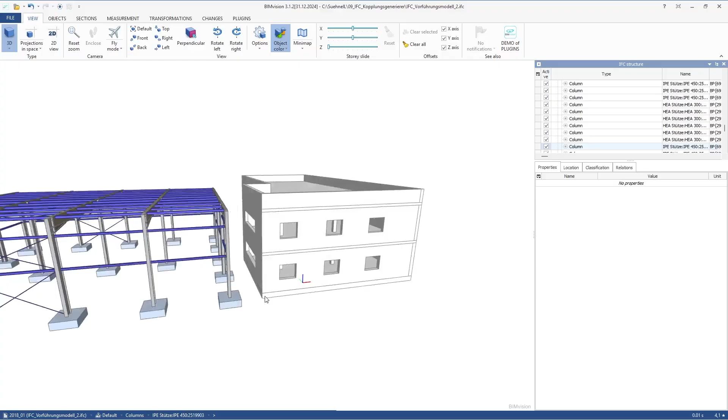Let's start directly with the IFC model that I want to use for today's presentation. I'm using the BIMvision IFC viewer for that. You can see it's some mixed structure - we have a steel structure on the left-hand side and a regular simple concrete structure on the right-hand side with some columns inside and so on.

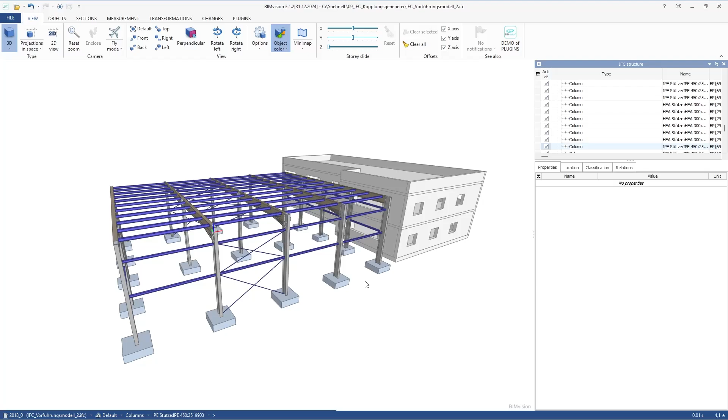Concerning the steel structure, there are already some steel joints included, some bolts, some stiffeners and so on. So this is the IFC file that I want to use for the creation of the analytical model in RFEM 6.

How can we use such an IFC file? This can come from Revit, Tekla, or any other CAD program. How can we use it? Well, let me show you in RFEM 6 directly.

First of all, we have to import the IFC file. I think this is clear. Via File, Import, IFC - that's the right path. I can select the IFC model and import it.

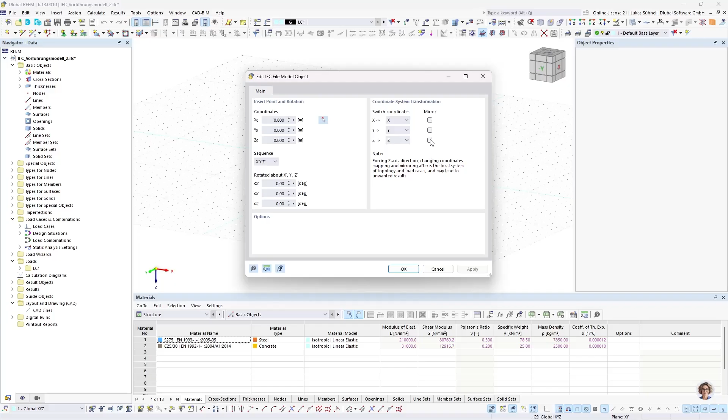Now, the first screen that will show up is dealing with the insertion point and the mirroring of these structures. Usually you will have to mirror it in the CAD software. The Z-axis usually shows upwards; in RFEM 6, often downwards. So in my case here, I have to mirror the Z and the Y-axis.

Then the import will be started, and in a couple seconds we will see the IFC file. So that is the IFC file that we just imported, that we also saw in the BIMvision viewer. And we can also show it inside RFEM 6.

So what we currently see, this is no native data. We do not have any members, we don't have any surfaces. The objects that we see here are IFC objects, graphical objects. And we can display them because we have an IFC viewer integrated, as we can see here.

And if we click on an object, we can also see the properties. Similar to any other IFC viewer, we can see that this is an IPE 450. Concerning the materials - it's German, but it's a metal, it's a steel S235. So we can display also the information from those IFC objects in RFEM 6.

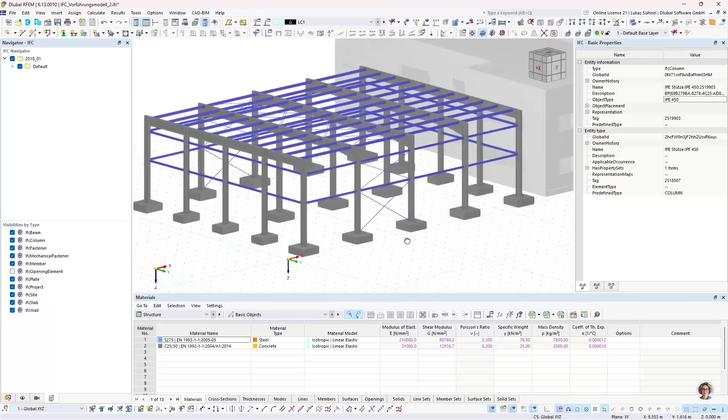On the left-hand side, we have an additional navigator, and this navigator allows us basically to hide specific objects, specific members maybe, or in general whole IFC entities. For example, the fasteners here - I don't need them here in RFEM 6 right now, they are of no use currently. Therefore, I can hide those fasteners and any other object that I'm currently not interested in.

So what is the next step? We have graphical objects, but we need native data. So it would be nice if we can convert IFC objects into members and surfaces and maybe solids. How can I do it?

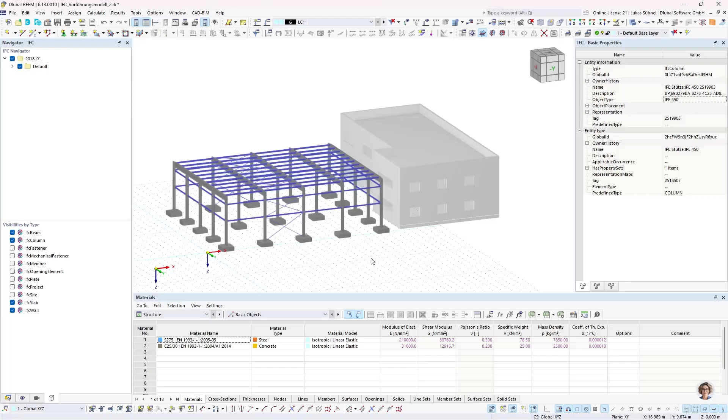Well, this is quite easy. When you have only the objects visible that you want to convert, you can select them and call up the context menu with the right mouse button and say convert into members, into surfaces or solids. Before we do this, we have to take care of the conversion - as we can see here, the material is a so-called metal, construction steel S235.

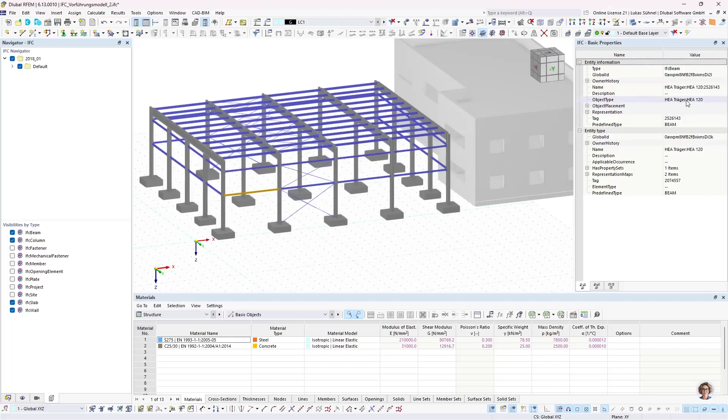Even though it already contains basically the necessary information for the steel, the whole name does not fit the name of our material in our own library. So after the conversion of such a steel, we will not get a valid material. Same for the cross-section, or some of the cross-sections - the names are not always according to our database. For example, here the name is HEA beam HEA 120. This is not according to our library.

So we have to convert these strings, these text fragments, into our own cross-section and material names. How can we do this? Well, under the CAD-BIM menu we have conversion tables, divided into material and cross-section conversion tables, and we import the additional information from the IFC file into those tables. These tables will be extended whenever you import another IFC file. So it's not a one-time conversion table you create here - you can use it again and again, the more you fill it.

Since mine is a bit messy here right now, let's start from scratch. I will delete all the materials and all the cross sections. Oh, this is really a lot. Let me do it a different way - I hope it works. I'm selecting the first and the second. Okay, now I have empty conversion tables and I can manually fill them.

That's also possible. Instead of the IFC import filling the tables, we can also manually fill them, using this little button on the right bottom here: Add new entry from IFC object.

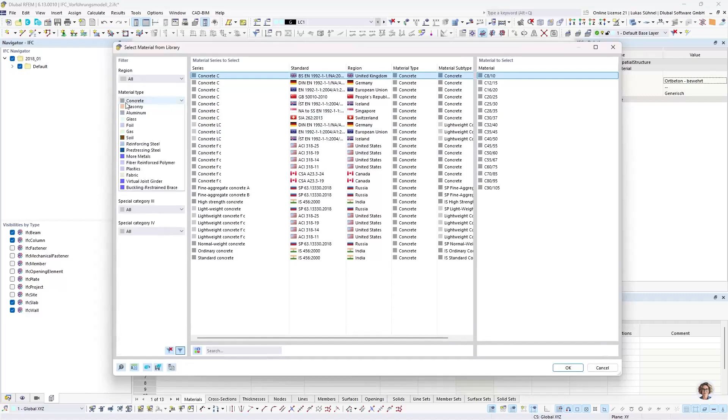Let's start with the concrete, because this is already the table that we see here. So I will pick a concrete C30/37, make a copy. And concerning my steel, I change the filter and search for an S235 according to the Eurocode. Then my material conversion is done.

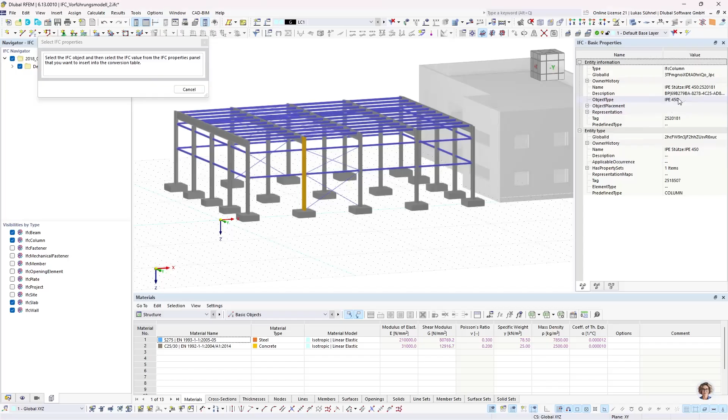Concerning the cross-section conversion, same logic. I can import the name from my columns, for example from the object type property, and it will import not just the IPE 450 name, but all the names written in the object type for the IFC column entity. Now I have also IFC beams, so I do it one more time. I click on a new row, select my beams, and for IFC beam objects I want to read the name from the object type here. Then I have all the necessary cross sections imported.

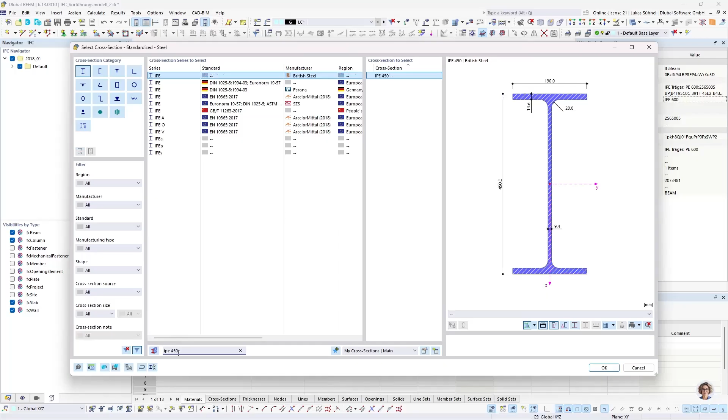Now I can simply assign my cross sections from the library. Let me do it here - IPE 450, I think it was. Did I type it in? Yes, okay, takes a second for some reason. According to some Euronorm manufacturer or related manufacturer, then I can copy it and just rename it here, IPE 600.

Then I do it one more time for the HEA 300. Okay, copy it, and then just change the numbers. For the round bar, I just type in R20 - here I know the description, and it's an R20 section. For rectangular sections, we don't have to do it; the program will automatically detect the right dimensions.

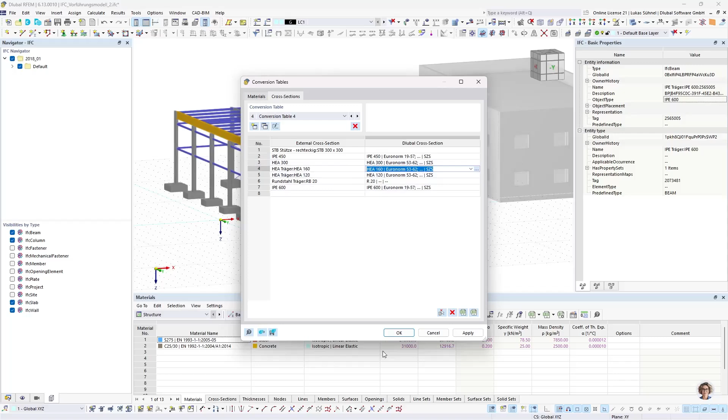So this was a little bit of work, but as I said, these tables will be saved. Next time you run an import, these cross sections will be covered, and you can basically use it again and again. All right, now the material and section conversion tables are ready.

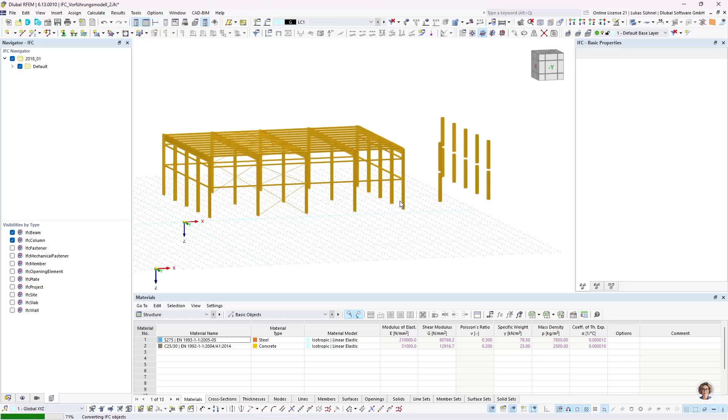We can do the conversion now of the beams. So let's hide some additional IFC objects to select all member-like objects in one step. Right mouse button and convert into straight members. Conversion is running on the bottom left side - you can see that, and it's done.

And now let's do it also for the slabs and walls. And even though there are some RFEM members in the background, it doesn't matter. We can right mouse button here, select the IFC model objects, and say one more time, convert into surfaces.

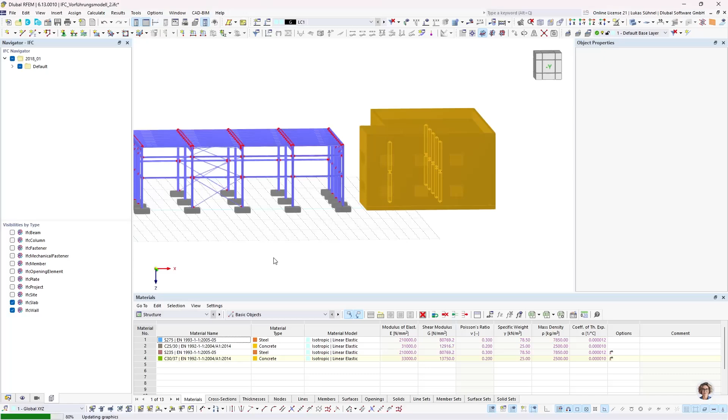All right, so now these objects that we see are native RFEM objects. We have members and surfaces here. And we can also double check if the location is correct.

How can we do it? For example, by switching the model data on and off. I deactivated the object types here, so this is my IFC, as you can see. And if I show my model, you can see it's basically on the same location. Yeah, it's identical to the IFC. All right, so that's good.

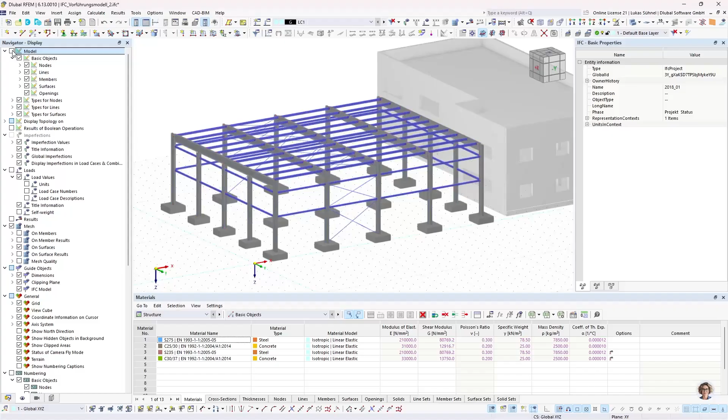We used the information from the IFC to get the right cross sections and the right materials into RFEM 6. Also, the thicknesses of the slabs and walls was taken from the IFC. So that is quite nice.

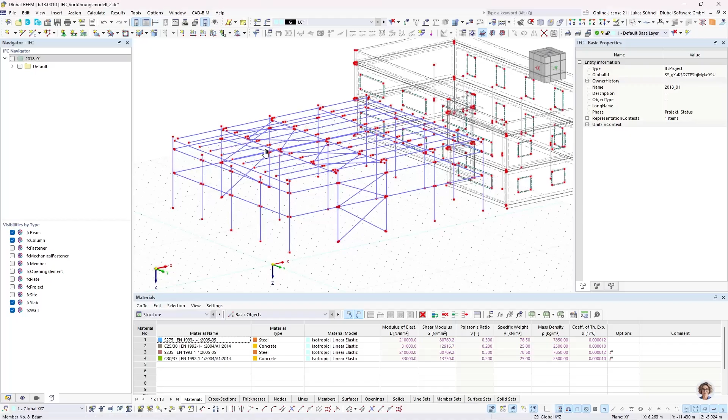What is not so nice, but it's a common or well-known topic, is that the elements are not connected here. Why is that the case? I think it's quite clear, but let me briefly explain it one more time.

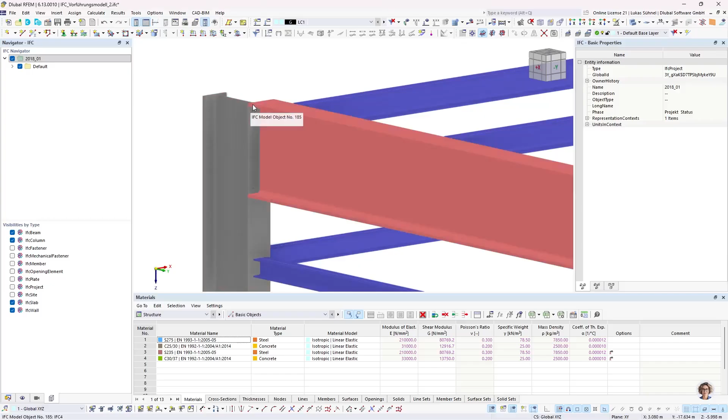With the conversion into members, we create the center lines in these objects, and these center lines have a start and end point, based on the start and end point of that IFC object. Since this beam is connected to the flange of the column and not the center line, and the center line of the column is in the center, there will be a gap.

Let me show it one more time here on this specific example with the wireframe model. I think it's clear where the gap is coming from. So what can we do about it?

We were always able to use functions in RFEM 6 to elongate members. I was always able to select a couple of members and say, extend and trim these members, extend them to the next member in line in both directions, and then those coupling members will be connected to the columns. This is working fine for this scenario here, for this single case.

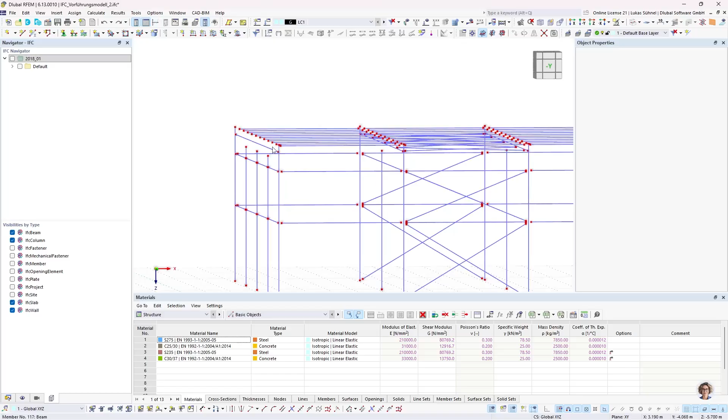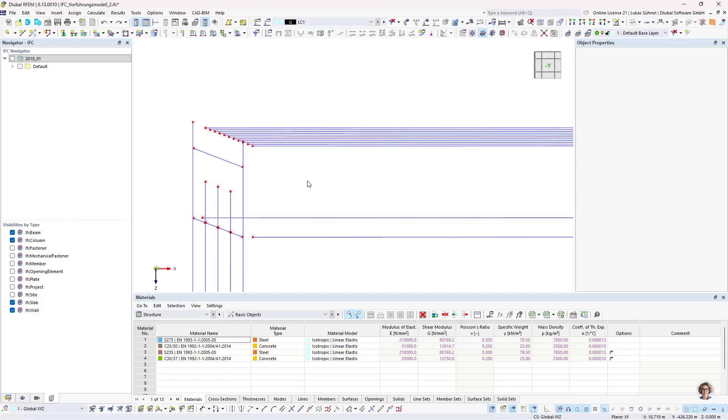It is not working in such a way for these coupling members in the roof plane, simply because they are eccentric. They are not in the same level as the main beam. So a simple elongation or extension will not solve it. I would have to project all these members into the plane of this beam, and then I can extend them. So it's quite a lot of work to connect this whole model together.

So what else would be an option? Another option could be that we create couplings between these nodes and members, and members and members, and so on. And this is what we used as an idea for the next features that I want to show you.

We recently implemented two new objects, and you can find them in the types for nodes and types for lines. We call them nodal link and line link. A nodal link is basically a little generator that creates rigid members.

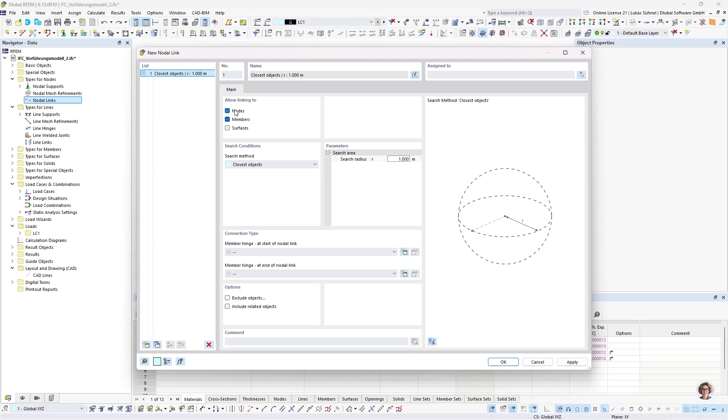So if I can show it in a second, what does this nodal link do? It will create a rigid link from a node that I have to select, and it will search for other nodes or members or surfaces in a defined search area, a search radius. So as an example, I can select a node, or let's do it for one first.

I can select, for example, this node here from the main beam, and say please connect to the next member within a 1 meter radius. I say okay, and it will connect to my column, which is good, this is what I want. And what will it do? As I said, it will create a rigid member.

Okay, so what could we do now? We can go into this nodal link and say, hey, instead of just starting from one node, let's select all the nodes, maybe also these down here. Say okay, and please search for another member close to your location, and let's see what happens.

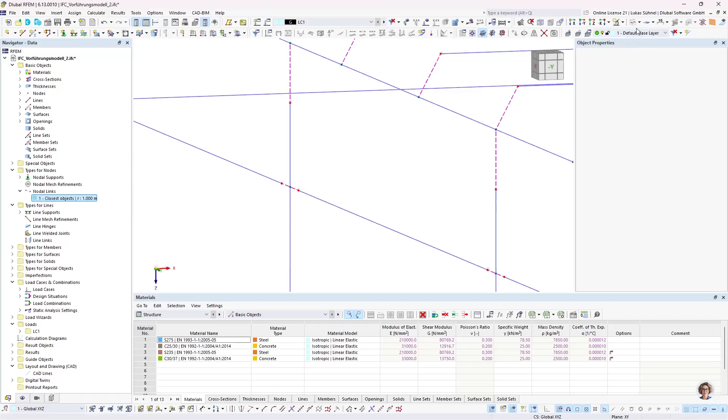We can see that a lot of those nodes, more or less all of them, will be connected to a member close by, and it's looking actually not that bad. I'm showing the wireframe model because it's more visible, but for general orientation, all these coupling members in the roof plane are now connected to the columns and to the beams and so on. So this is looking quite nice, not bad for spending not even half a minute on that.

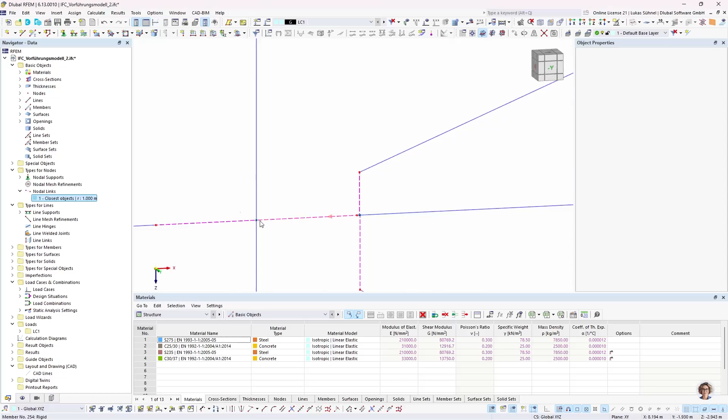Let's have a further look here at the diagonals. And here we see, well, that's maybe not the expected result. I have here the diagonal members, and they are not connecting to this node on the column. They are connecting to these coupling members, and this is actually not what I want to have here for my analytical model. The same for the diagonals down here and for other joints as well. So that's one little concern where we maybe have to do something against.

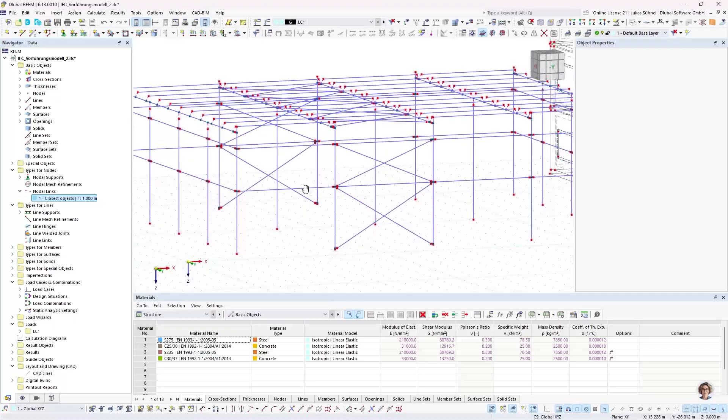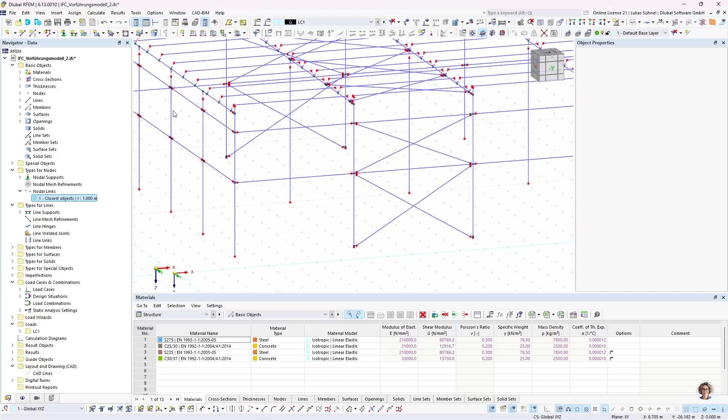The other thing is this one nodal link creates rigid members. And these rigid members, according to what I defined here, have no hinge. So every object is connected rigidly to the other object. So we have a completely rigid steel structure now, which is not correct for the later structural analysis. So what can we do against it?

Well, we could create multiple nodal links and spend a little bit more time on selecting the nodes properly. So let me remove this one here. And let's think what we want to connect first. So let's say we have different cross sections in the structure. And one is, for example, the IPE 600s. These are the main beams of my structure, and they have to be connected to my columns.

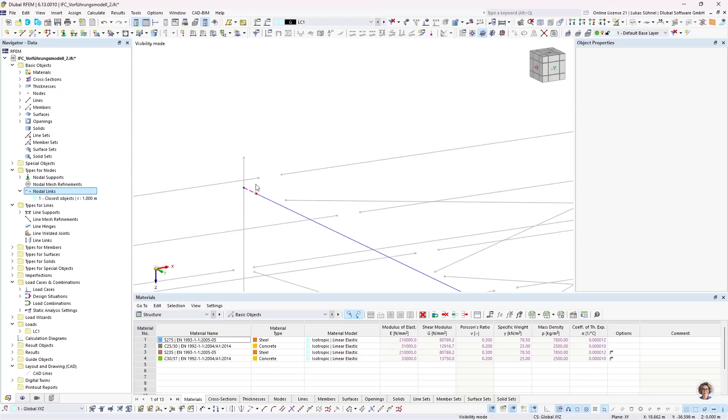So one node link could deal with the connection of my main beams, these nodes, to my columns, so members close by. So this node link should look for members. And it should be a rigid connection, so I'm not defining any hinge. And this is done now here. We can see all these couplings between the main beams and the columns are done. And if we want to be really nice, we can even rename this nodal link and call it, I don't know, column beam link or something like that.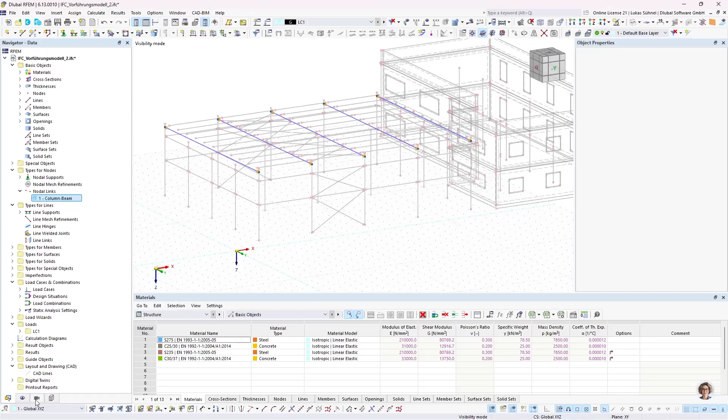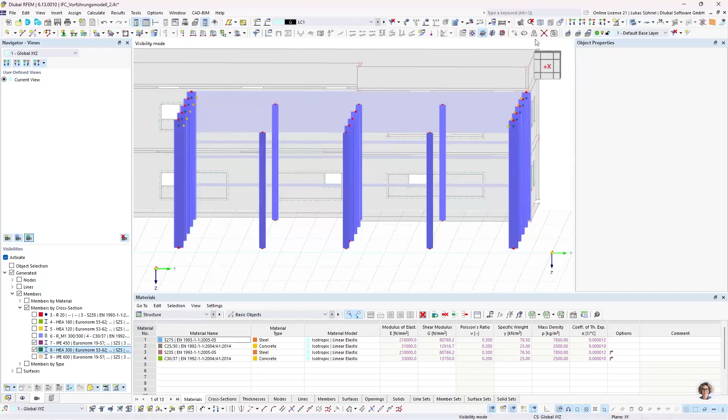Then we can create another coupling. What could be the next one? Let's have a look. We have additional columns down here, I think the IPE 450. So these center columns here have to be connected to the main beams, and also these columns on the outer frames should be the HEA 300. Also, those have to be connected to the main beams. So another nodal link could be, let's call it inner column beam.

And again, we are looking for connections from specific nodes, which I can select now, to members close by. Maybe we want to connect them not rigidly, but hinged. So we can create a member hinge and connect them. So now they're also connected. And in this way, we can continue. And I want to do it so you can see some obstacles that we will also face in here. And the next one will already show one of these little obstacles.

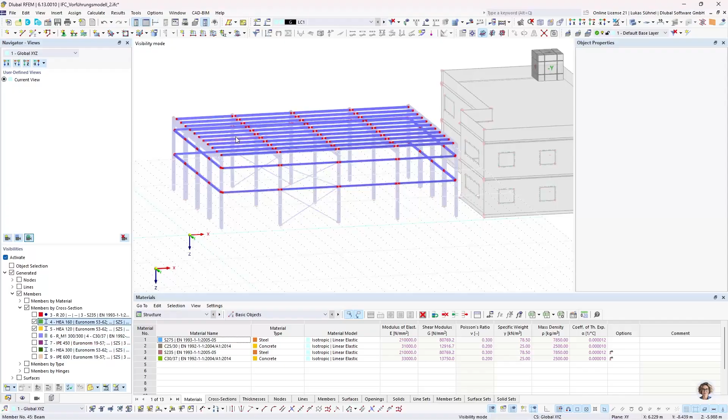So let's say we want to connect all the coupling members from my structure, which are usually between my frames. They should be connected to the columns and so on, and to the main beam. So another node link. I skip the renaming now. I think it's clear how it's working. So I select all of those nodes. And again, I say, please look for members close by. And maybe use a hinged connection. Okay, now all those members have been

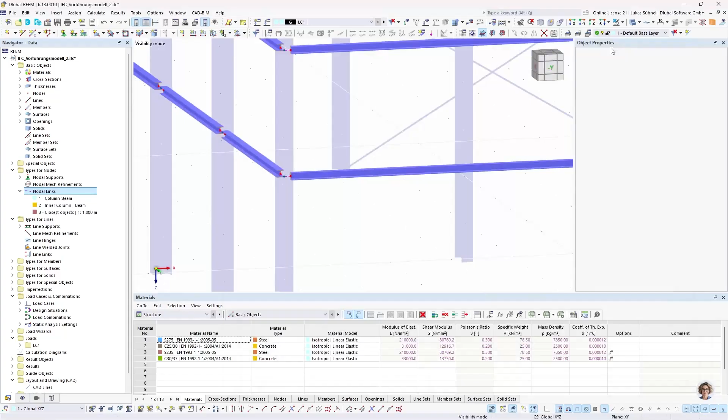linked to columns and so on, like I wanted, apart from these situations here, where I have the diagonals. From that node, it should look for another member close by. And it's not the column. The member that is even closer to this node is this diagonal. So it's connecting this way. It's logical, but it's not what I want to have here. So what can I do about it?

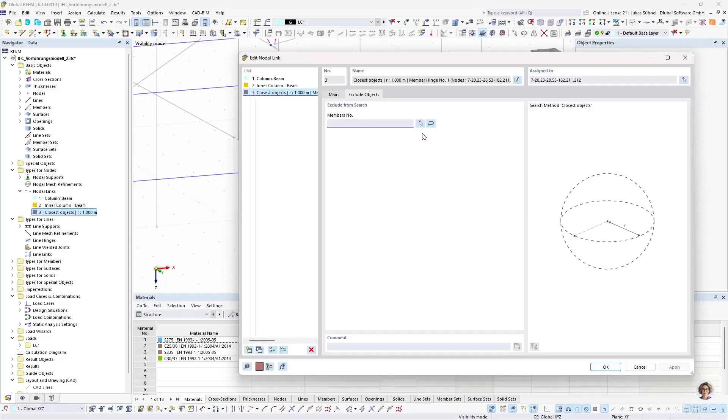I can go into this nodal link and say, please exclude certain objects from this search. Please do not connect to my bracing members. Exclude the bracing members from my search. And what will happen is this coupling member will now be connected to my column as I expected, and not to my diagonal beams here. So that's good. Let's continue.

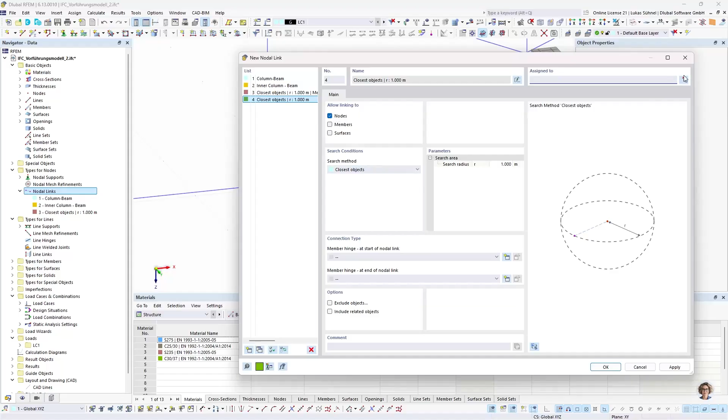I think there's only one rule remaining for the diagonals. And what do I want to achieve? I want my diagonals to be connected to this specific node here. They should be connected to the columns, not to my coupling members. So what will I do? I create another node link, and I say, this time, the selected nodes, let's select them quickly. These selected nodes, the end nodes of my diagonals, from those nodes, please look for another node. Connect to another node, ideally the one on the column.

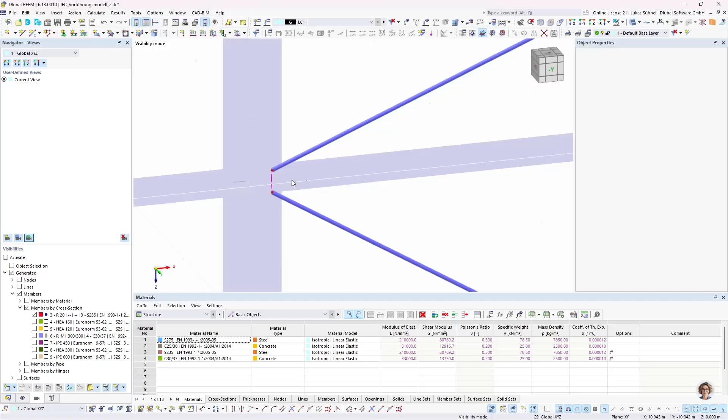So I press OK. And what will happen? I mean, expected. It will not connect to this node on my column. It will connect to the end nodes of my coupling members. So one more time, I have to go into my rule and say, please exclude the nodes from my coupling members from your search.

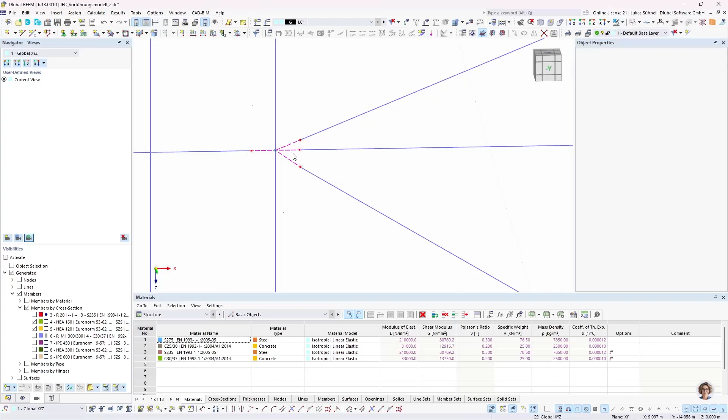And now the diagonals are no longer allowed to connect to those nodes. I excluded them. So the next node in a radius of 1 meter is the node on the column. So that's why they will connect to this one. And now my steel structure is connected properly, as I would expect it.

Okay, so far so good. Now, what can we do about the concrete building? If we have a closer look at this one, we can also see the walls and the slabs are not connected. Again, because of the same reason, the wall will end on the top and the bottom side of the slab, so there will be a gap. How can we close this gap?

Well, we not only have the node links, we also have the line links in RFEM 6, and they work in a similar way. From the lines that you select, it will create a rigid coupling to other lines or surfaces close by. So same logic, let's create one for the...

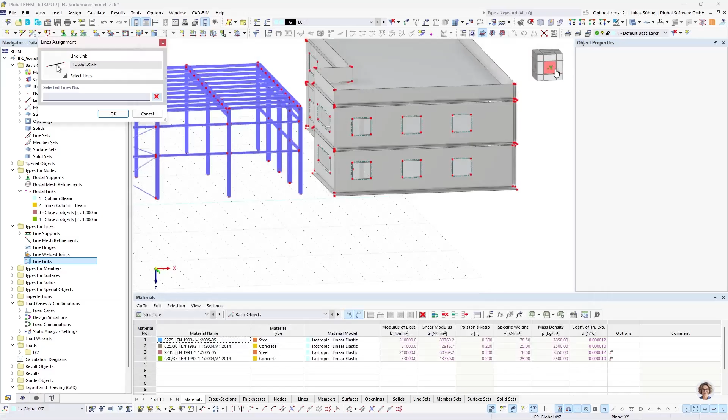wall slab coupling. What do I have to do in that case? Well, if I want to couple my walls with my slab, I have to select all the lines, basically the bottom lines of my walls and the top lines of my walls and so on. Yeah, this is what I have to do here.

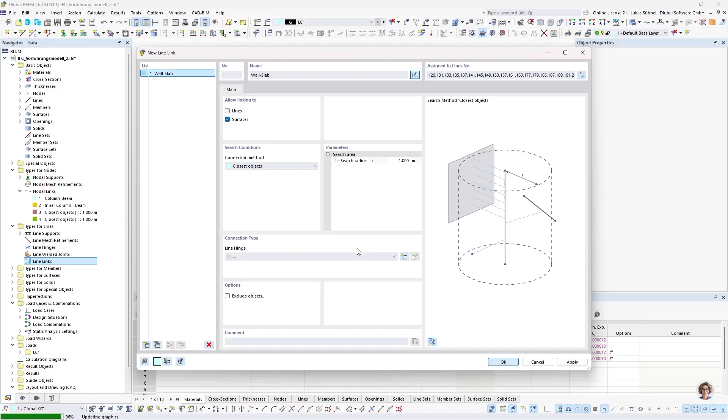Okay, it should look for surfaces close by and connect to those surfaces. This is what is happening here right now. It will create rigid links - that's how they are called. I named them incorrectly before. So this line link will create rigid links, and these links will connect the walls with the slab.

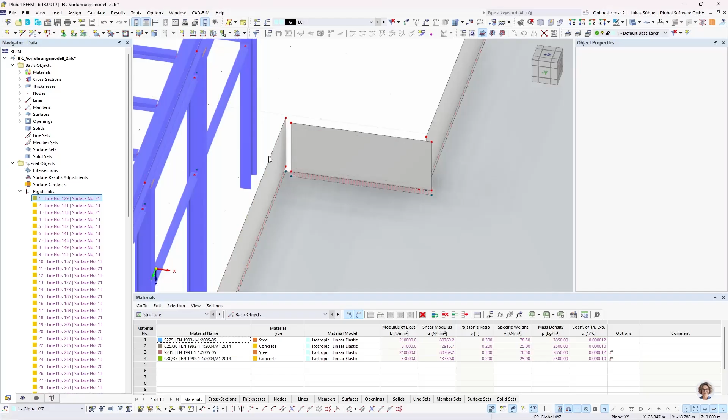So I would have to do the same again for my walls. I would have to select all the vertical lines for my walls so that they are connecting again with another slab, with another surface, which is a little bit of work. And I don't want to do it now because I think the logic is clear.

These are the nodal and the line links that we recently implemented, and they will help you to generate a connected analytical model that you can later on analyze, design, and so on. Now, the difficult part, or the part that currently we have to spend a lot of time on, is the selection of the nodes and the lines for these line and nodal links. This is a bit work intense. It's quicker than anything we were able to do before, but it's still a bit work intense.

So our idea was that we want to create a little generator that does this for you, that will select the objects. You can find this little generator in the model data, on the base data, in the settings and options. And here we have the rule-based link generator. You can create a new rule set here, or you can also do it here in the data navigator of RFEM 6. It doesn't matter - the activation of the rule-based link generator has to be done here in the base data.

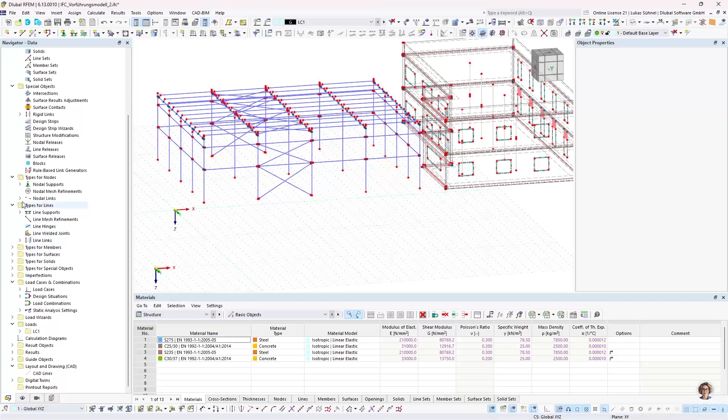So before we do this, we want to get rid of what we just created here manually. So I get rid of all these links. And if I delete them, the nodal links and the line links, all these little rigid members and rigid links will be removed. So you're back to the completely unconnected model.

So what can I do? I can call up my rule-based link generator. And here I can define types, and those types will connect certain objects with other objects. For example, really simple, the wall type. The wall type will select all the vertical lines of surfaces, and from those vertical lines, it will create a line link.

And inside that line link is defined: please look for other surfaces. So when you select the vertical lines and you say please search for other surfaces, it will connect to other walls. So this is the wall link. We also have a wall slab link - I think it's clear what this one is doing. It's selecting the horizontal lines of surfaces and connects them and lets them search for other surfaces.

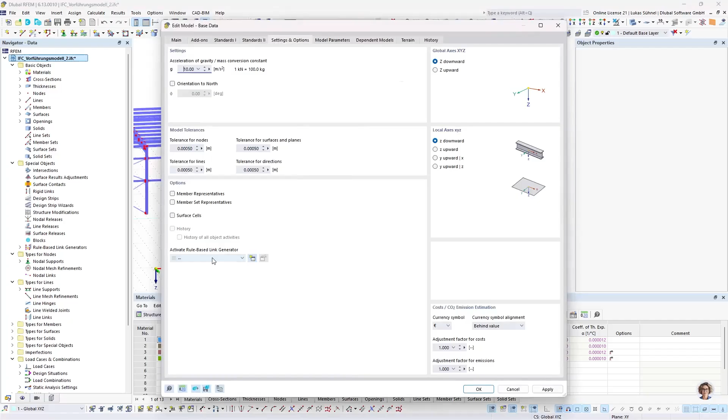So let's press OK. Let's see what happens. Well, currently we can see nothing happened. Everything is still unconnected. And this is clear because I just explained it before. If we want to activate this generator, we have to do it here in the base data. So I can select the rule set one that I just defined. And now all those couplings will be generated.

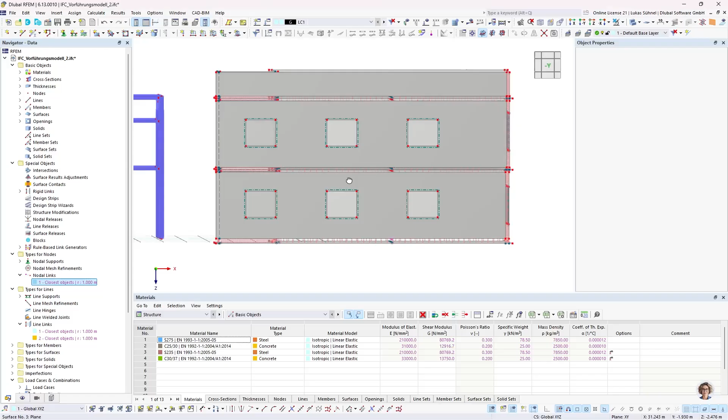We can see it in the data navigator. It created now line links and also nodal links. The two line links are for the connection of the walls with the slab and for the walls with the other walls. So all the manual selection that I had to do beforehand, with the lines and so on, I can skip it. It's no longer necessary. This is what this rule-based link generator is doing. And it also connected these columns with slabs, basically.

So I'm done for the whole concrete model on the right-hand side. The only thing I have to do is define additional rules for my steel structure on the left-hand side, because this one is still unconnected, as we can see. And also for that, I have specific types. Let's have a look.

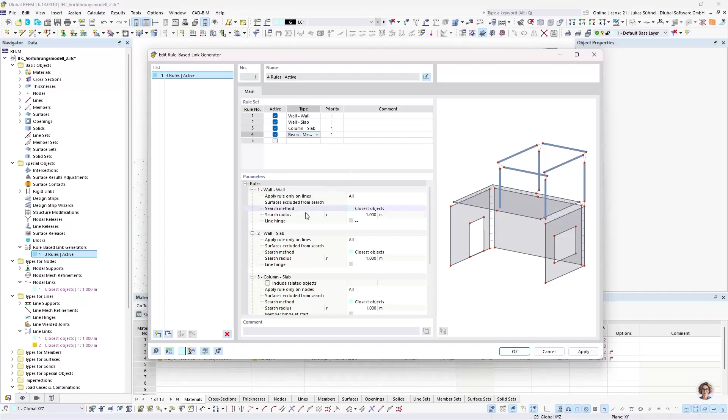I have, for example, here a beam member type. What is a beam member type? Beam means it will select the end nodes of horizontal members and connect them with other members close by. This is a rule that I need, because I want to couple the coupling members with my columns, for example. I also want to have a coupling between my diagonals and my nodes. As we defined it beforehand, the diagonals should be connected to specific nodes.

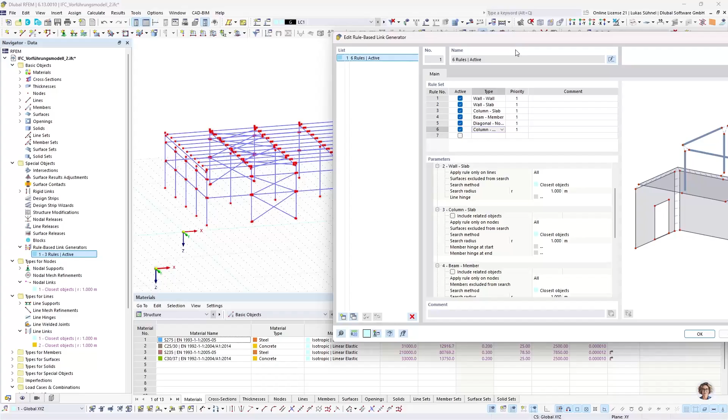And last but not least, I want to have my columns connected to my members, to my beams. So this rule will select the end nodes of vertical members and search for other members. This is the rule that I want to use to couple my columns with my main beams. Okay, I hope I didn't forget anything. Let's have a look what it will do. I press OK, and the rule will directly be used.

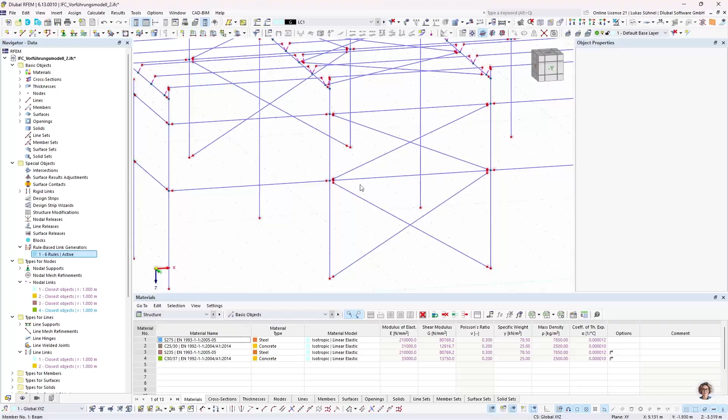We can see here the coupling members will be connected to my columns. Also here in the roof plane, we can see the coupling members are connected to my main beam. So this is all looking quite nice. We have a little issue here. My coupling member is not connected to my column. Instead, it will connect to the diagonal member. We had the same issue beforehand.

So we have to go into this rule-based link generator, select here the beam member rule, and inside that beam member rule, I have to say, please do not use the diagonal members for the connection. The same we did before. Please do not connect to the diagonals. Press OK. And now, we can see it here, the coupling member is connected to the column.

Now, the other issue that we have is, again, the same issue. The diagonals will not be connected to this node. They connect to this node. So these detailed settings have to be done in the rule-based link generator, similar to what we did manually before. Exclude nodes from search. And here I select now all the nodes from my coupling members.

And now the diagonals are connected properly as I would have imagined it. So these kind of settings have to be done in the rule-based link generator as well. But the selection of the nodes from where we want to have a coupling, this is done automatically. And we're still not finished.

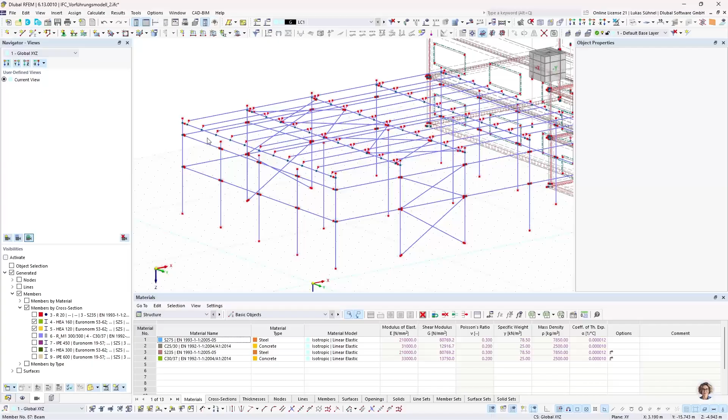As you can see here, the columns are not connected to the beams. These inner columns are not connected to my main beams, which is a little bit strange because, as you remember, we defined here this rule column member. So why is it not working? Well, we already have a column slab rule. And this rule at the top will be executed first because it has a lower object number.

So this rule, what does it do? It searches for the end nodes of vertical beams, of columns, and then it will try to connect these end nodes with a slab close by. This rule will be used for all vertical members, for all columns, so also for the steel columns. But this is not correct. It should only be applied to those columns on the right-hand side.

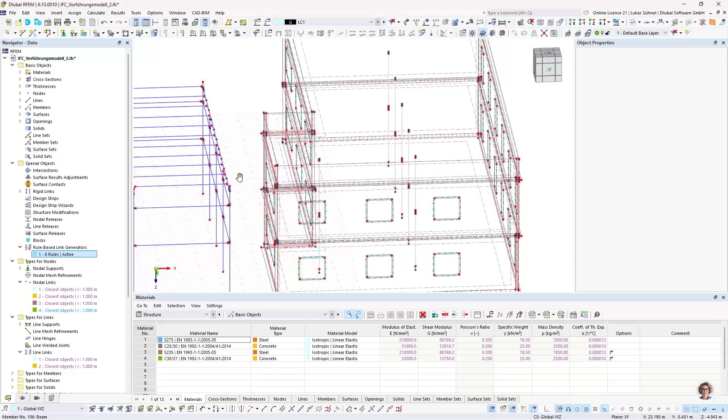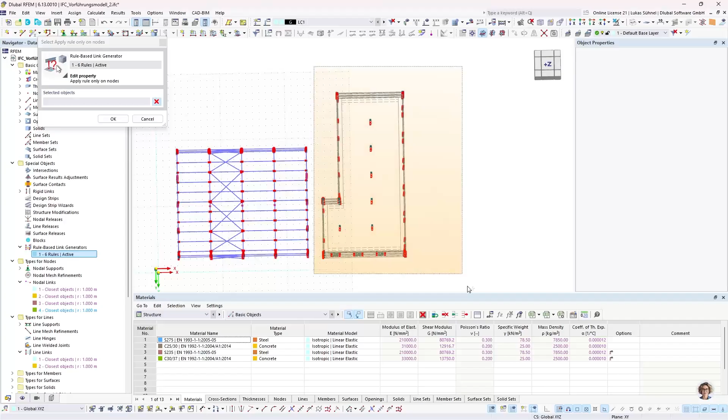Because what is the issue? This rule basically uses all these nodes, and then those nodes are no longer existing for the second column rule, where I'm looking for other members. So what can I do? I can go into the column slab rule and say here, please apply this rule only on this kind of structure here. It should not be applied on my steel structure.

And by doing so, the nodes from my steel columns are no longer utilized by the column slab rule, so they are free again, and then the column member rule will use them to connect them to the beams, which is what I expect.

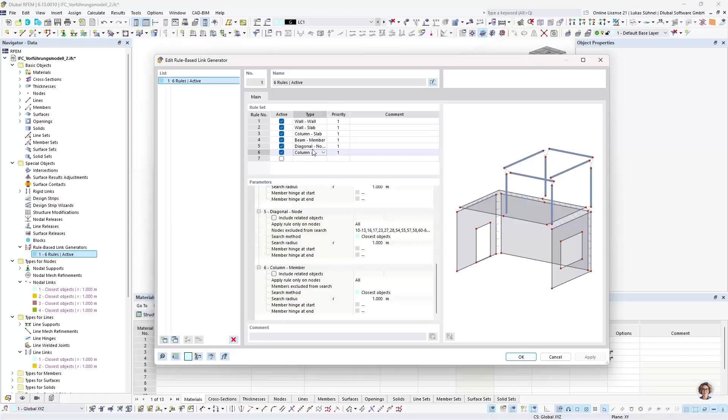So now it's looking better. They are connected. The only little issue that we have here is that the columns are now also connected one more time to the main beam. This is not okay. I don't want the connection from this column to this beam. So here I can go back into my rule-based link generator, and in this column member rule, I have to change the search radius a bit, so that it no longer connects this node with the beam.

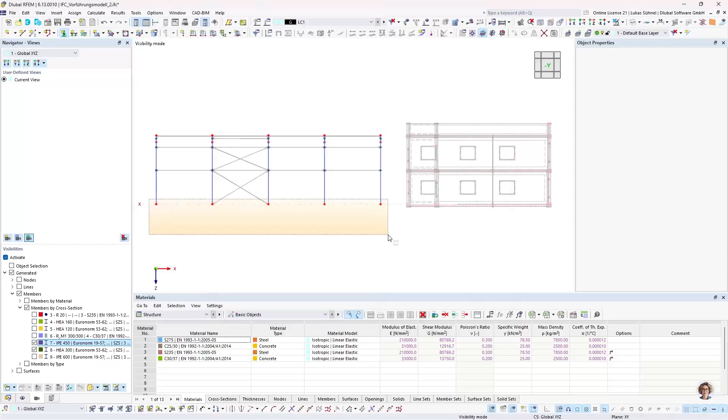Now I have a properly connected analytical model for the steel structure and for my concrete structure. And all I have to do now is define some supports. Let's do this quickly. Oh, that's the wrong one. HEA 300 and IPE 450. Here we have a nodal support. And then we also want to support the concrete structure, the foundation slab, basically.

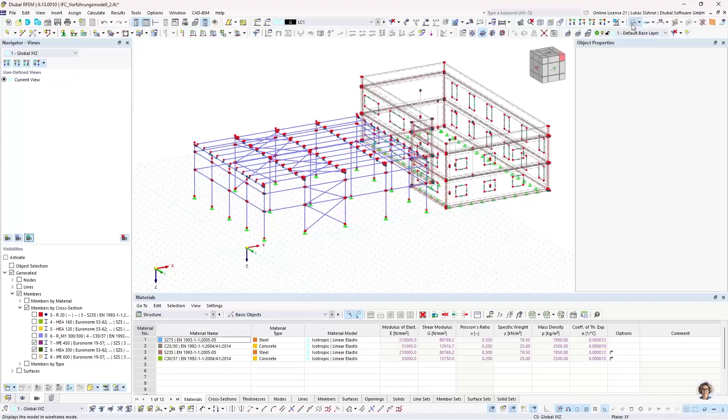Now the structure is supported and we can run the static analysis. I hope I made no mistake. This is just a little hint that we have lines which are equal, which is fine. They are the result of the line links of the coupling between the walls and the slab. We have a wall on top of the slab and a wall below the slab, and from both walls we are connecting to the slab. We are creating generated lines on the slab and they are identical. So that's why we have this little warning about lines lying on top of each other, but it doesn't matter. So now we have the results.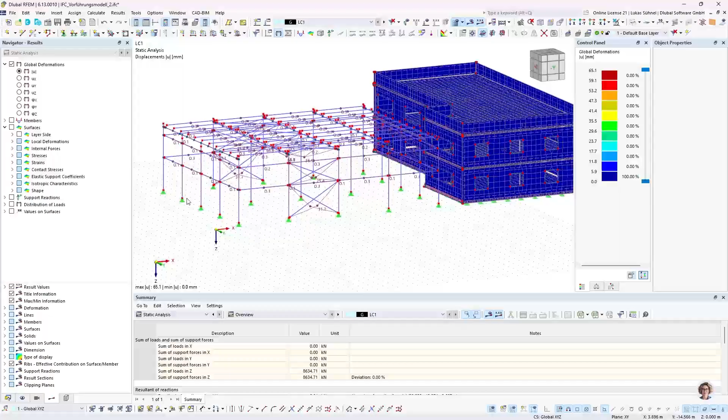What can we see here? Well, let's change a bit to the wireframe mode. We can see the deformations. Maybe something I forgot to define here are some hinges for the bracing members. That's one thing I can optimize. But apart from that, I have here my internal forces, axial forces, bending moments, and so on. And if you compare it to a model that you build up in the common way, you will see that they are quite identical. So the static analysis can easily be done with this model that we connected with the rule-based link generator. Now we can continue with applying loads, running a steel design for buckling, lateral torsional buckling, and so on.

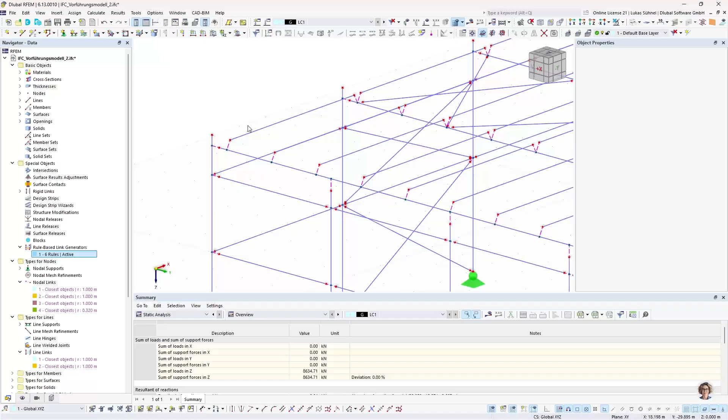I have to say there are some exceptions which we are aware of, which we will work on. For example, if we want to run the steel joint analysis right now: due to the fact that we are using rigid members here, we currently can't use our steel joint add-on. It simply does not acknowledge these rigid members. But we already have a plan how we want to treat this so that you can continue working in the common logic of RFEM 6, so that such joints can also be designed in the steel joints add-on.

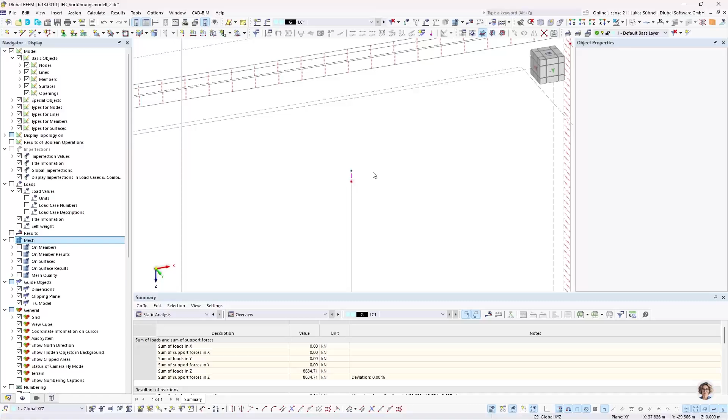Similar to the punching design for concrete, currently the columns are not directly connected to the slab, so we are not aware of the cross-section from the column. Now it's this little rigid member. So again, there are some optimizations necessary in our design add-ons so that we can keep working with them in the way that we are used to. But as a first step for using IFC files, I think this is the right direction. The rule-based link generator for a more automated connection, or the nodal links and line links for a bit more manual modeling, can be used to connect these otherwise unconnected converted IFC file objects.

So far regarding those two features. What else can I show you here? The objects that we generate from the rule-based link generator, or the objects that we create from the nodal links and line links, we can always convert into ungenerated objects. Right now I have used my rule-based link generator to create nodal links and line links. These objects are now generated. I can't modify them because they are generated. You can, however, cancel the generated state, and then they are open for your manual modification.

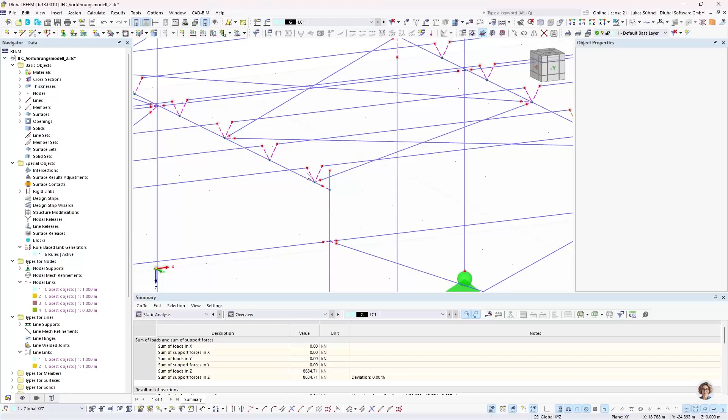The same goes for the rigid members that we create with the nodal links. You can always cancel this generated state, and then this rigid member can be manually modified again. So even if the final result of this generation is not 100% according to your expectation, you can use it to generate the objects and then use them for further modeling by canceling the generated state. That's what I wanted to mention.

The other thing I want to show is, switching to the latest chapter, the export of the IFC model, is the saving of the originally imported information from IFC objects. So what did we do? We imported an IFC model.

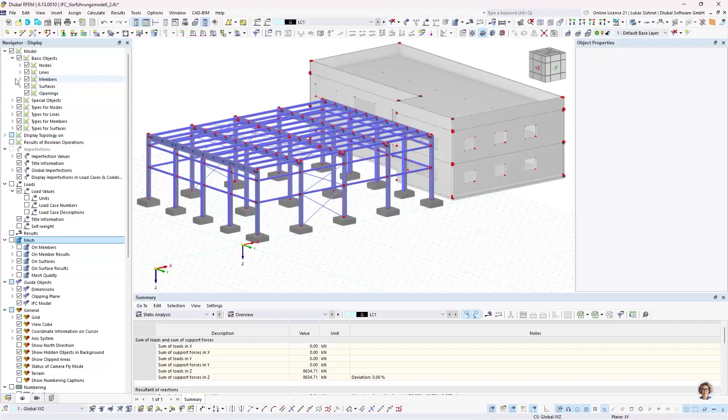I can show it one more time. I'm hiding my RFEM model. We can see here, this is one of these IFC objects that we imported. We have here the global ID, 0TLI7 and so on. The global ID is quite an important information, in my opinion, because when we later on want to compare IFC models, this is usually what has been used to identify objects. It's a unique ID.

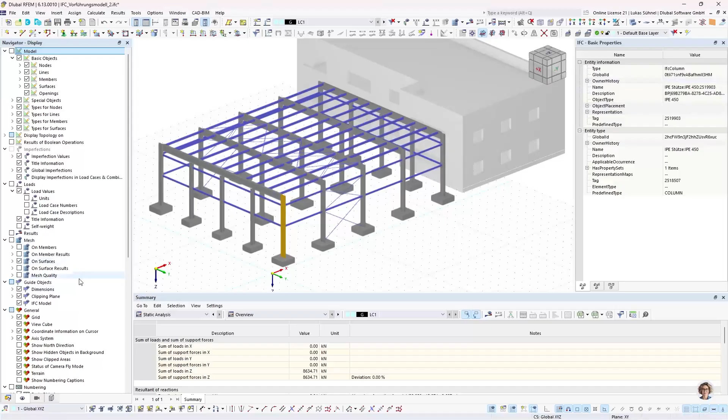This unique ID will also be saved inside our members. So now I'm here in the native RFEM data. And if I double click on this member, we have here this BIM tab. In here, we see all the information from the IFC file, for example also the global ID, 0TLI7, what I just mentioned beforehand. And when we now run an IFC export, this information will again be used in the IFC object that will be created from RFEM.

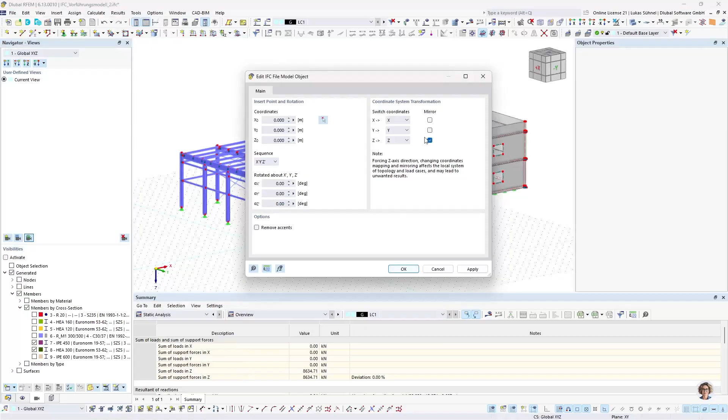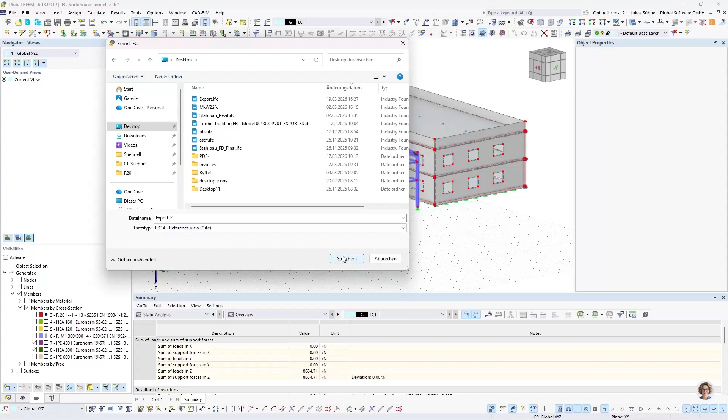So let's do it one more time. File, export, IFC. I'm mirroring this one again, put it on my desktop. Export_2, I can select here reference or structural analysis view. In the old software generation, we always had only a structural analysis view export. With RFEM 6, you can also export into the IFC4 reference view, and this is an IFC file that other IFC viewers and CAD programs usually can open.

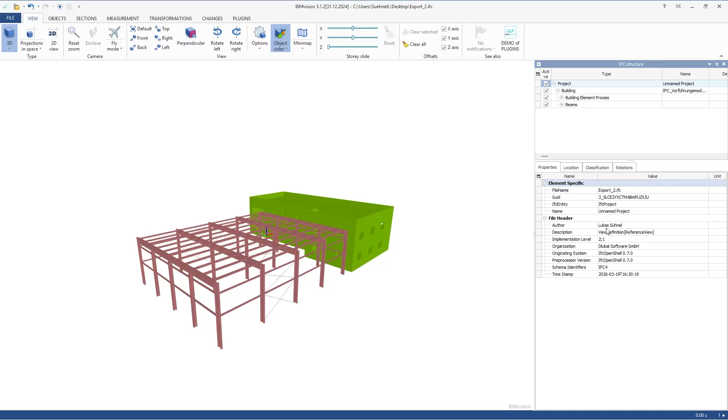So the export should be done. Let me quickly open this file. IFC export, export2.ifc. So here we are, this is the IFC file that was just created by me with the Dlubal Software. We can again see these elements. We get the information from the cross section, and in here is also mentioned the material according to RFEM 6, now S235 and the material standard.

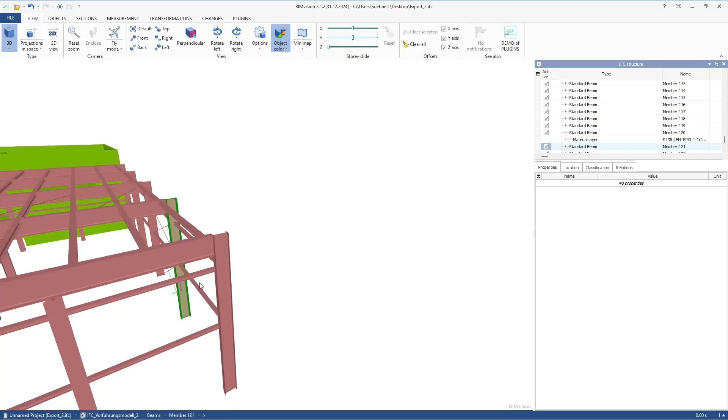And if we click on the same column again, this one here, we can also see it has the same GUID. So this IFC file that we exported from RFEM 6 can now actually be used for a comparison with the original IFC file, maybe to track the changes, track if we used a different cross-section or material, or if we moved the object around, because the GUID is the same. And with this new logic of coupling elements, you can also see these IFC files look nicer. The beam stops at the location of the column, and it's not intersecting the column into the center line, what usually would happen if you do your regular modeling of analytical files. So this is also a little bit of a benefit of this new way to model your analytical models.

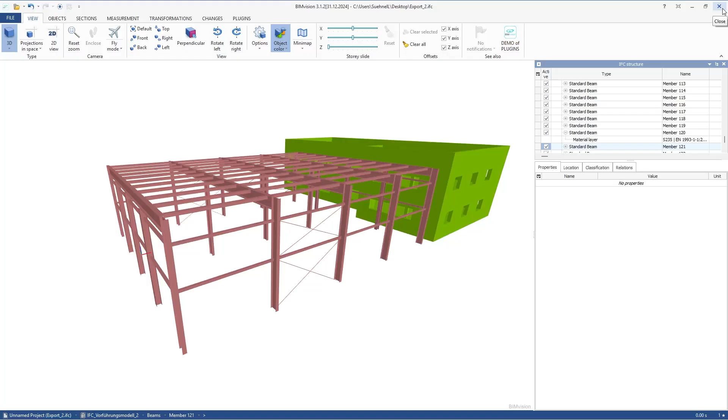And with that being said, I am at the end of my part. I hope I was able to show you some new features, the nodal links, the line links, and the rule-based link generator. I hope that they help you in maybe further use cases where you want to work with IFC files. And if you have any feedback, please let us know. Again, with that being said, I hand it back to you, Andreas.